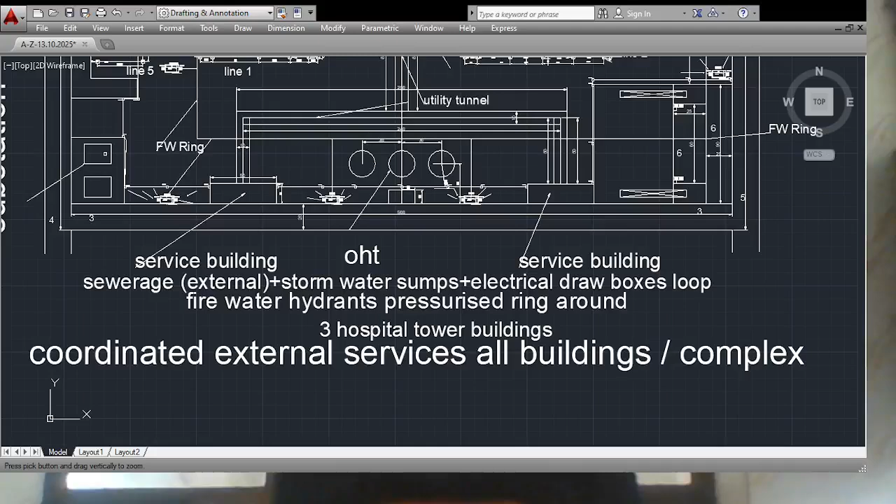This is my supposition based on soul, and I would like to say that this is something good for everybody. I'm just trying to tell you about the soul of this year. Gregorian calendar, this is called.

It is just because today is the day, and I would say you all enjoy this year all over the world. 2026 is a very good number. In fact, 20 has nothing to do with it, but 26 - the meaning of 2 plus 6 equals 8, and this year means result is system, but 6 is important here because 6 has got many positives.

6 is the number of mind, brain, and you can say your brain is linked to whom? Your brain is linked to satellites of the soul. I'm not talking about television or electronic satellites, I'm talking of that.

So enjoy this year in a way that you should not get tension, but tensions will be there, there will be so many issues. This year, 5 has gone already - 5 was control, whatever could be made has been made and destroyed actually. So whatever it is, I'm saying congratulations everyone that you are entering number 6 and 2.

2 is already there for a whole decade, but 6 is a very important number here, the number of mind here. This is mind here, and 6 is the number of mind. People may say it's the number of Venus, I'm not concerned with that.

This was based on site work, it's not just theory. So now I just dug out that record. In 2025, I had with me this paperwork since 1992.

I had worked a lot manually on these paper drawings for a couple of years in those days, which I converted to a township. At that time there were no computers, nothing. I just used pencil or ballpoint pen and scale, and drew on drawings, sheets and graph papers.

I'm just trying to recall. But at that time, due to whatever reason, I could not realize that people wouldn't come forward. I tried with many promoters like DLF, Pushpa Builders and many more, but they were not interested in such a vast project. At that time it was quite big, so I shelved it because I could not arrange any promoter.

Then I again went in '95 to Gulf countries for my job. However, I came back in 2008 to think about something, and then I started doing computerization on these drawings, but I could not complete it. However, it doesn't matter, just the background. I'm telling you, but the fact remains that now I am at some position where I can say we can do this project if some financer comes or some promoter comes.

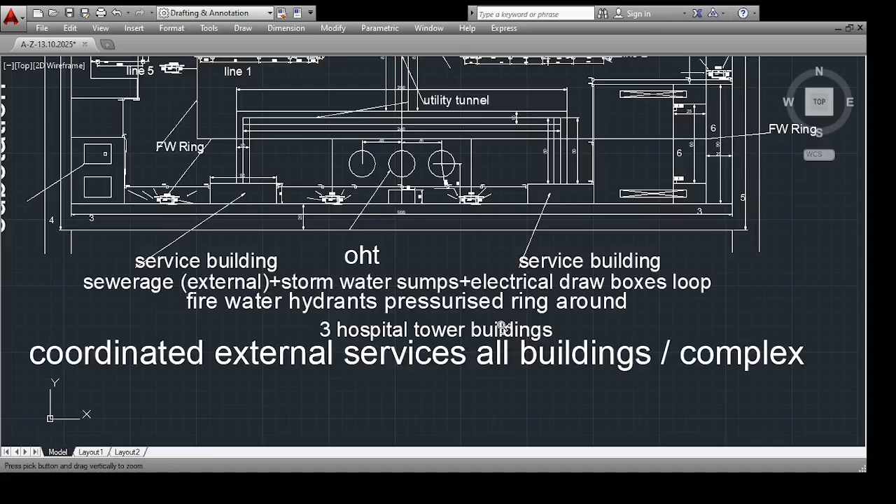This is a complex of hospitals, high profile hospitals. I'm not comparing this hospital to anyone else, I'm not comparing this one. There are certain services which I've shown. You can see this building here.

You know what I have done in this is very much interesting, if you feel so. In this, you may say what all lines we cannot understand. Yes, you may say that you can't understand these lines, but these are factual lines, no jokeism. Now if you see closely here, you see like this. What do you think it is? Can you understand what is this?

Let us say this is your line work here. What these lines indicate, if you have seen this anywhere in this world, if you do not remember, I will tell you. This is here swastika. You know, swastika, this misconception of the all over world. This is swastika here, and this is base of our country. Swastika means something that resembles good health, best health.

This symbol, some people call it Satya and whatever, I don't mind that one. Here these are two sides, here these are two sides, or you may say three sides and two sides, whatever you can say, doesn't matter. Name is swastik, and this was also worn by a top killer, Hitler.

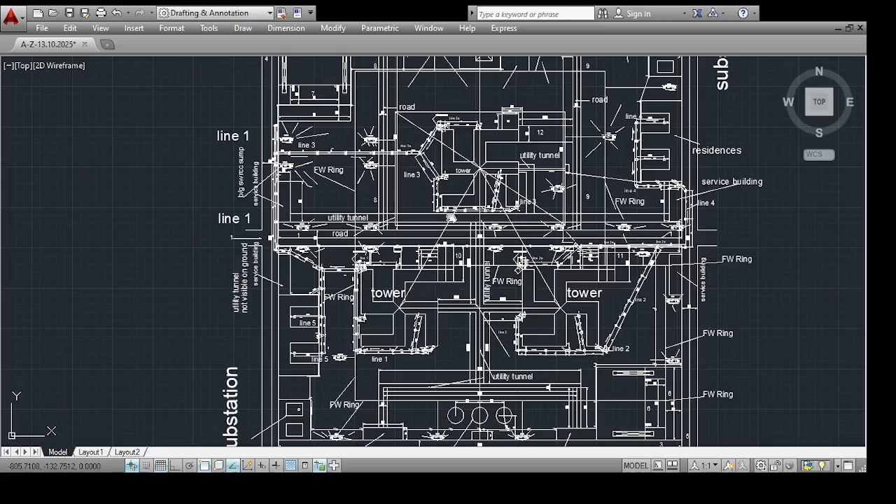Why is that these are placed on a triangle? These three buildings contain hospitals, and you may call this a general hospital. Now, why am I showing this? Not because I want to show you swastik, but because here is a question of services, building services. Every hospital is a complex building. If you consider really, it is hospital, it is based on efficiency or smartness of services which are required for the function of the hospital - it can be medical function, medical services.

Without services, without good and efficient services, hospital can never work successfully, and this happens all over the world. It's not that only in this country, it's everywhere. Hospitals are done that way. If these are not supported well for successful services, there can be no question that you can say, oh, this is going on well, this is a good hospital.

Now, another point is, I'm telling you about three buildings, this is one part of that. The another part is cars or vehicles. There should be space for vehicles. People may say you park in basement - that is not viable. I have placed here, you can see carport, car park, you can say.

This is a carport, multi-level, and there's another carport here in this corner. These are particularly meant for medicos, because generally doctors use a car, and this car is stationed there entirely, day or night, when doctors remain on duty.

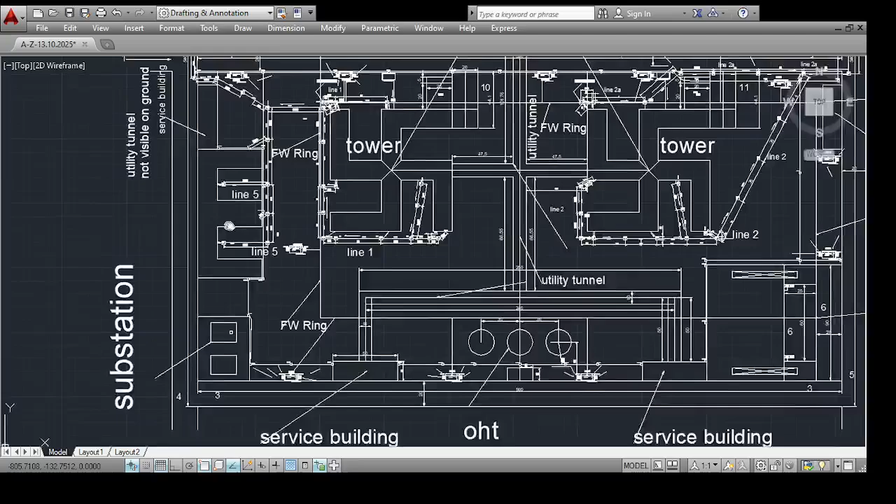Okay, these are two parts. Then what are the supporting buildings? There are more. Here are the main ones, and there is this building, and another building here. These are residence buildings, accommodations on site for the hospital, you may call them service buildings. Here is another service building which is for controlling services.

Now there are so many lines you can see. Why have I put all these lines here? These are required for purpose of coordination of services. Whatever services you provide in any complex or building, if these do not work successfully, there is no meaning of the building. In particular, for medical hospitals, there are so many services which do not exist in normal buildings. For example...

Roads are there, of course every building has roads and compressed roads, that's not an issue. Here is the FW ring, for example, I'm calling this the fire water ring. Fire water is very important in complexes, particularly in emergency-based buildings like hospitals.

Then there's another service, the utility tunnels. You may call it a tunnel or an underground way, whatever it is, where the majority of mechanical, electrical and other service equipment are accommodated, with piping and wiring and cabling running through. That's what's called utility tunnels. This is an RCC tunnel.

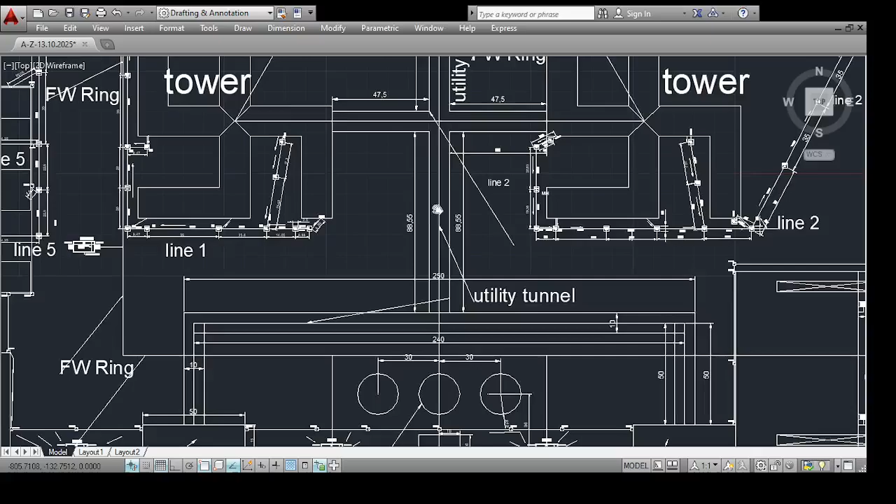Here roads are there, and utility tunnels. For example, I have taken a utility tunnel here, it goes here, then it goes here also, utility tunnel. You can see utility tunnel here, then it goes here also, utility tunnel. So it's all like an underground RCC box structure, and here it goes, you can say here also it goes.

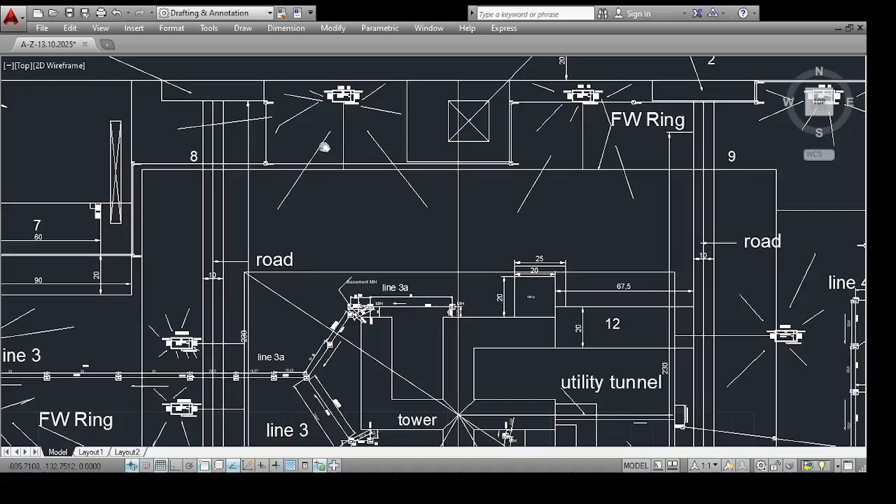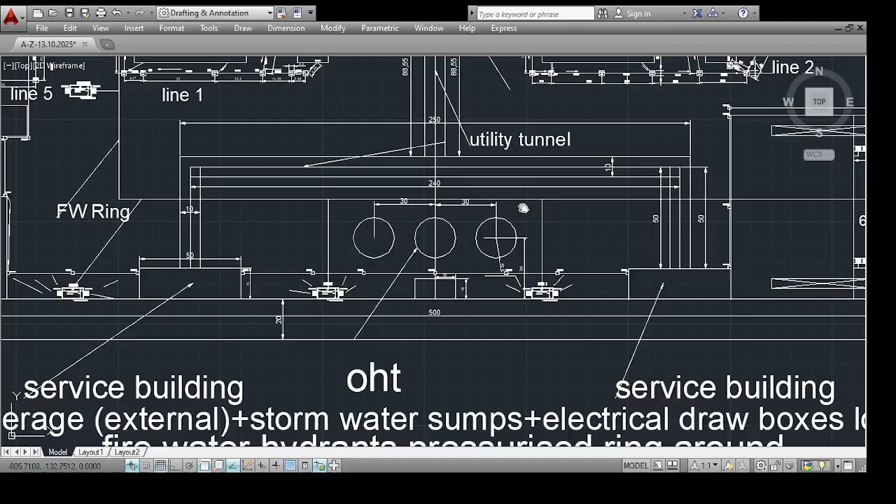Likewise, you can see there are service areas and water tanks. These water tanks, or you may take the other way, may be overhead or underground, it depends upon the request. Sometimes people don't keep overheads, they keep underground tanks with full-time pumping.

And here is another service building which is for the purpose of controlling services. There's a service building here, and also if you see here, we cannot say facilities are the same. No, these are not the same, this is different. Now, in every complex, services means sewerage, water supply, fire water, electrical, and whatever else. These are required. Most important is fire water, then HVAC, then electrical, storm water drainage, sewerage.

These are all necessities which such kind of special buildings, emergency buildings, hospitals require. And there are so many other minute services also which I am not going to show here, it's not possible.

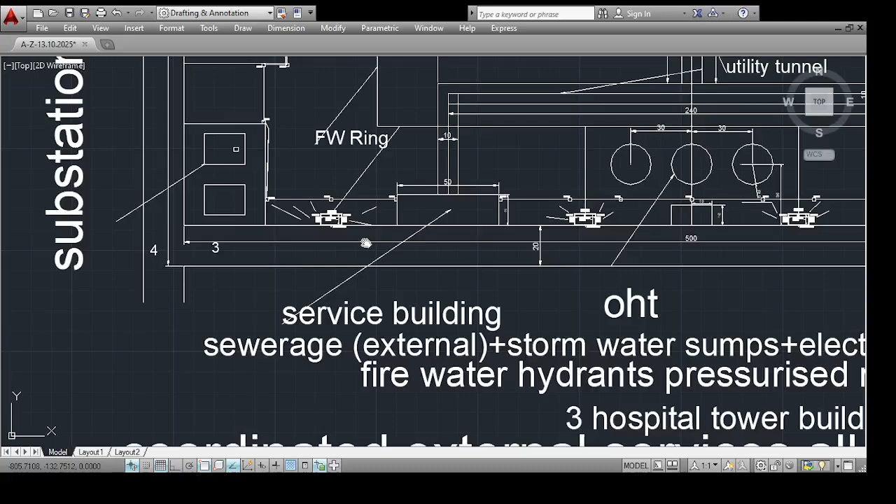And here is, you can say, this is another one which I have shown like this.

it is, just a minute please, let me check my internet because sometimes it goes off here.

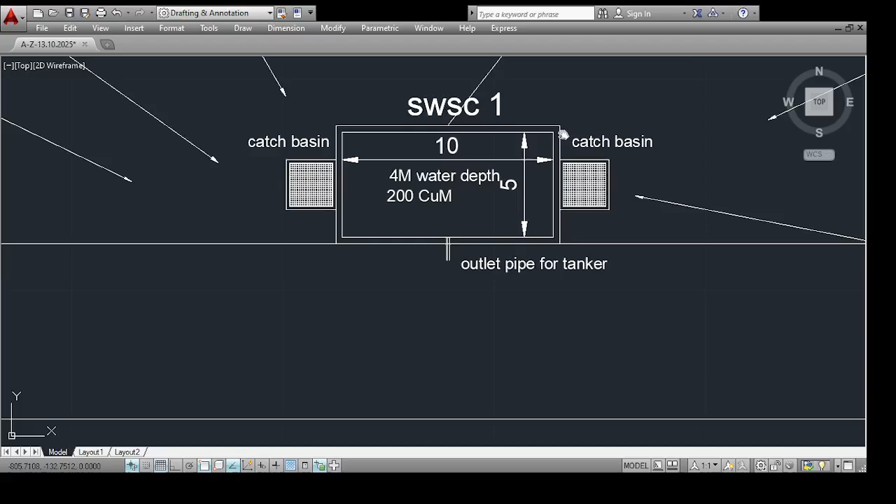And here is, this time 43 minutes. Now this is here, SWSC 1 I have written. What does it mean? Storm water sump chamber. Sump means underground sump. Here is a catch basin.

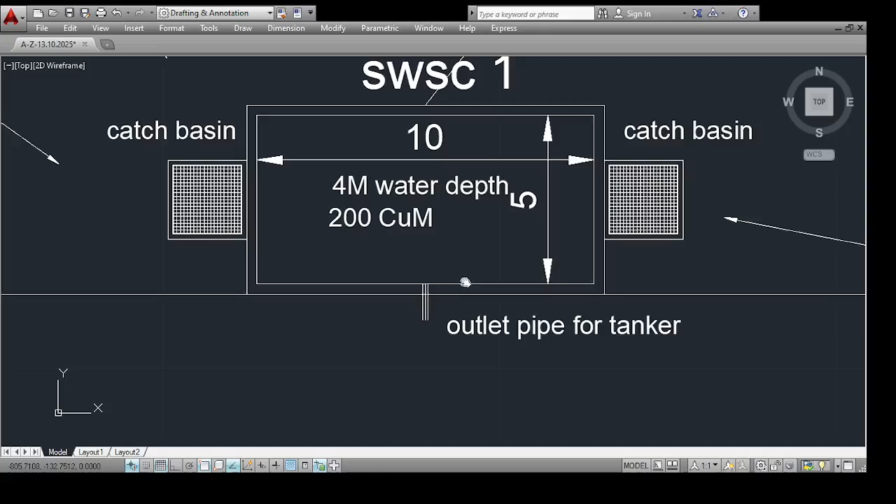Now this is a sump chamber which contains 200 cubic meters of water below ground level. It's not going to be fire water, it's not one tank or one reservoir there, there shall be many such structures.

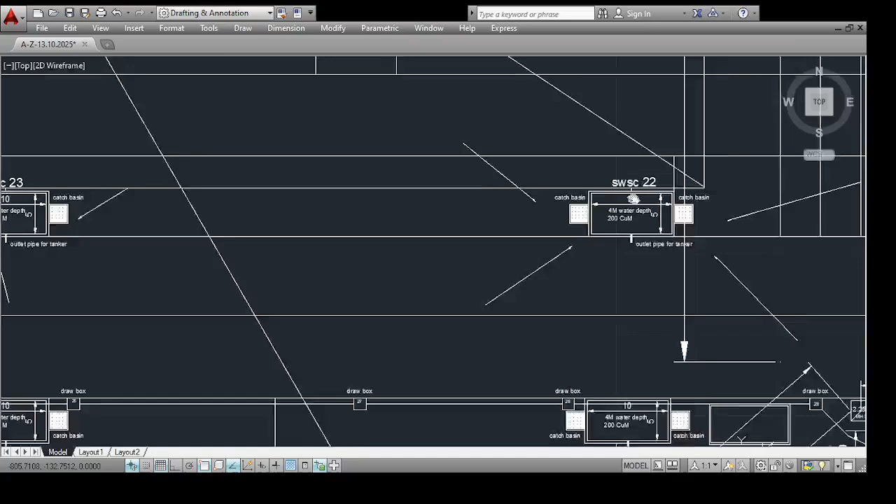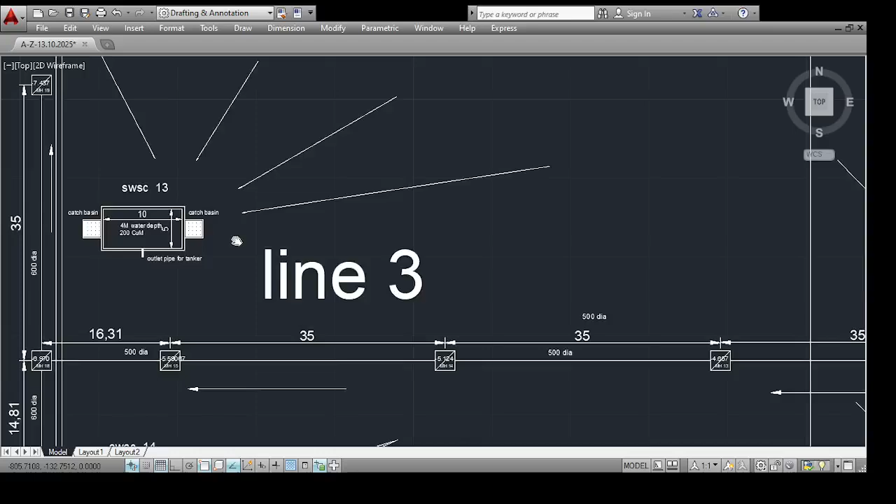So you can say 25 is here, 26, 26, let's say 26, it doesn't matter, numbers mean it. Now what does it mean? Why did I put it? I told you I want to collect rainwater and let it flow to this chamber, or you can say reservoir.

Maybe you are surprised, do you know how much is 200 cubic meter? Many people do not know this. Oh, 200 is very small, they will say, they will understand it as 200 liters. No, it's cubic meter. Cubic meter means if you say 200 cubic meter, multiply 200 by 1000, so you get 1000 means 3 zeros, 2 lakh.

It's like a water tank. And 200 cubic meter, I say 26 are there, let's say. So how many cubic meters there? You think so? 5,200 cubic meter water can be accommodated during rain in this.

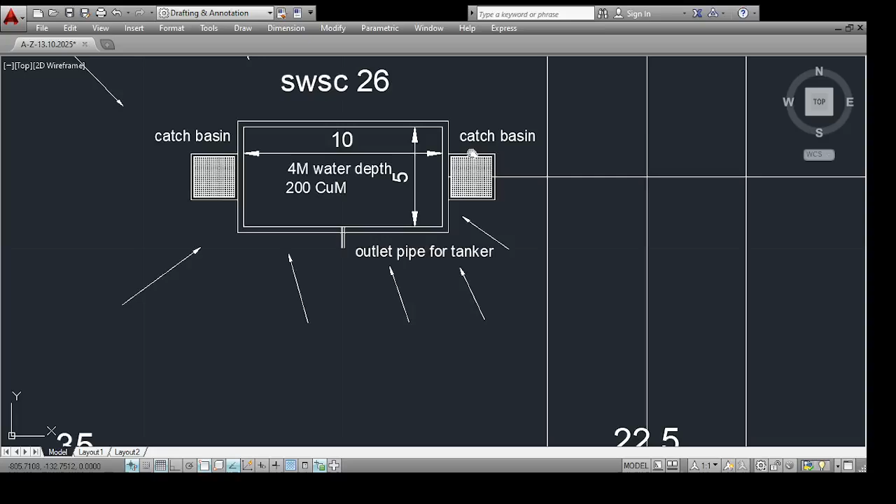And how it is? This is what we people have deficiency in our projects. Why is every complex flooded during rain? That's a question mark, because lack of thoughts, lack of understanding of construction engineering designs. But this is very small, very easy.

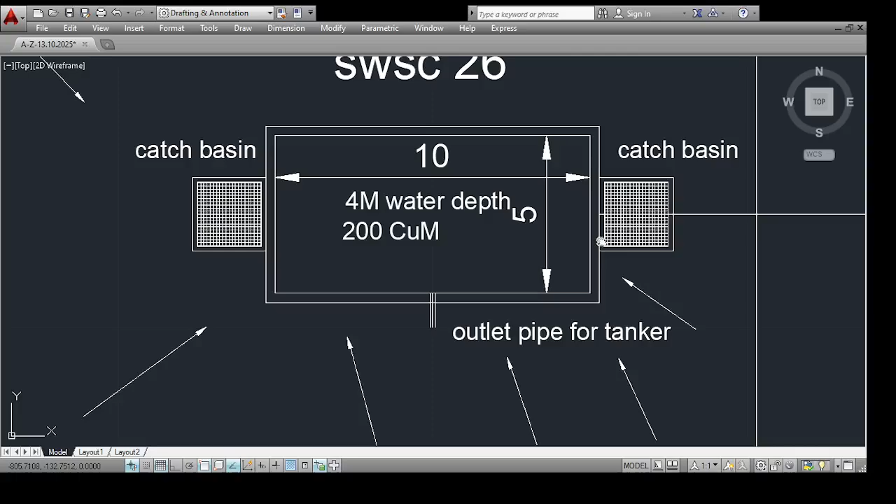I try to put catch basins on both ends, and I have given grades, ground grade, in a way that water should flow towards these chambers. Catch basin is there, and there is a section of that.

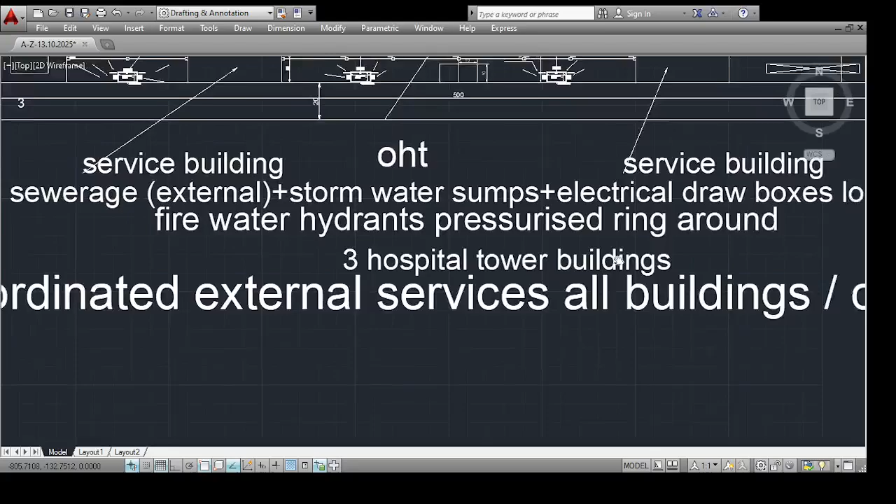I don't know, it's here somewhere. If I don't exactly remember, I placed some in the other drawing, not in this drawing, no problem, I can't open the other drawing now. And it's written service buildings, etc., and sewerage plus stormwater sumps and electrical draw boxes, loop, fire water hydrants, pressurized ring around, and these are.

There can be a lot of discussion on this, because rainwater has to reach from various catchment areas locally to these well located chambers, and from well located chambers this water has to go further at your timing. If you wish that it should go into ground, pipes can be connected below these chambers for permanent disposal to reservoir below ground or within ground, beneath in various layers.

Or if you say no, we want just to store this water, and at a later stage when there is shortage of water, we can use this water for whatever other purpose. It may be irrigation of green area, and it can be used for ordinary use, potable water like that. It can be taken to tanks for further use, maybe after filtration or after chlorination. Or it can be delivered to whosoever wants to get this water through tank. This water can be transported to wherever is required.

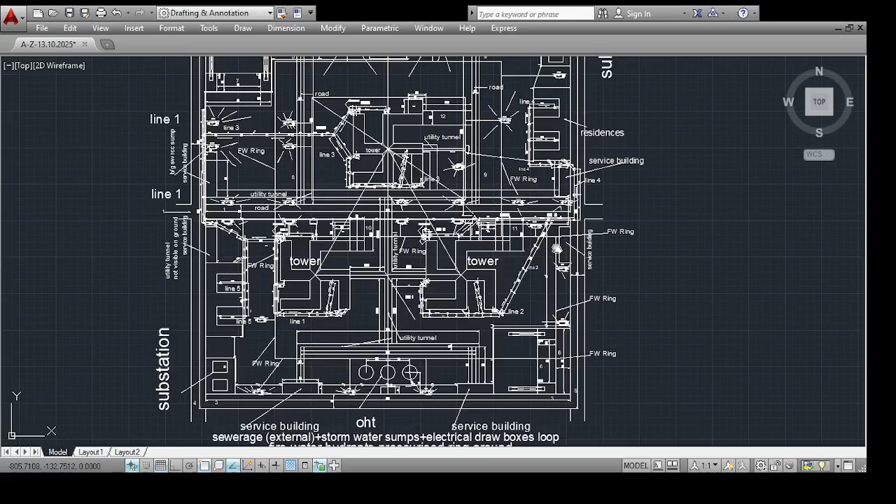That is the sole criteria behind that. This shall be an RCC structure, water leak proof, and this shall keep water in this. Yes, there can be chances of silting. You may say silting would be there. Yes, it can be there.

But we have various provisions these days on this catch basin, as I said, this catch basin here. On this catch basin, there is a section of the house shown, below which there is a mesh, a kind of cover, manual cover type, catch basin cover type, in which we can provide a kind of mesh so that we don't allow non-water impurities, or you can say dust, to go into this chamber. It shall be filtered out and removed.

That's the depth of this catch basin, also around 1. So up from that level it can go down into this tank, and there is piping also in this tank which can be used for the purpose of pumping water to whatever tanker if it comes. So you can say it's a kind of source chamber which can help you with rainwater preservation, and also many other purposes if you wish. This is that one only.

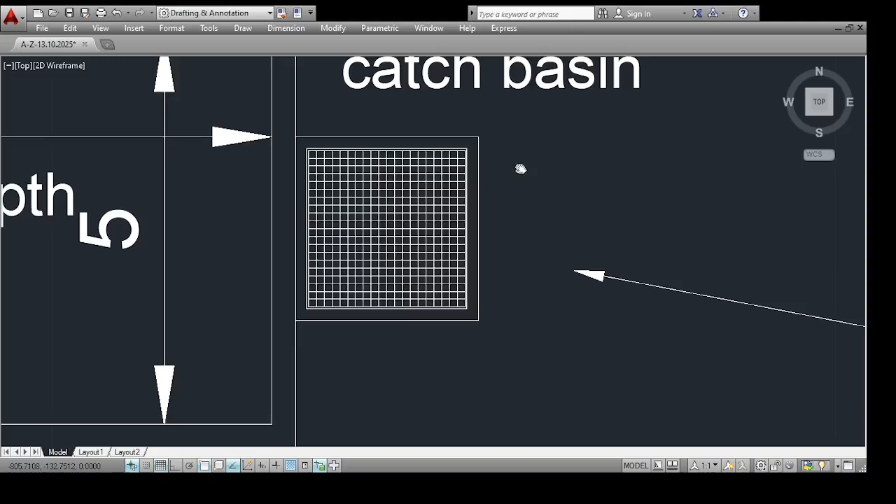And here is now fire water ring. As I said, what is fire water ring? People may ask you, it's not fire water, it's fire extinguishing water. Firefighting water is firefighting water. It is a very, very important part, and firefighting water is very important.

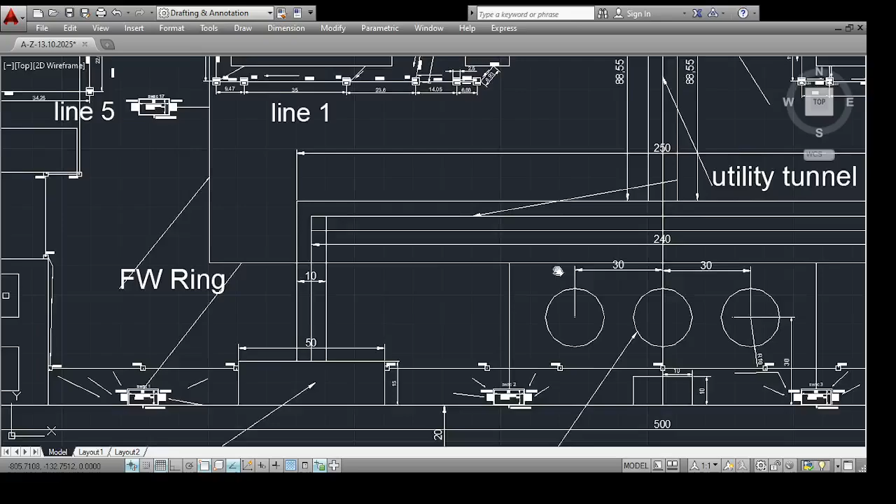15 minutes, okay, have a look on this, it's interesting if you think. Now, this fire water here, you can see this line. It goes like this, here it goes here, and then it goes further. This is fire water, then it goes this way, fire water ring, and of course it goes this way then, and then it comes here, fire water ring is around this structure.

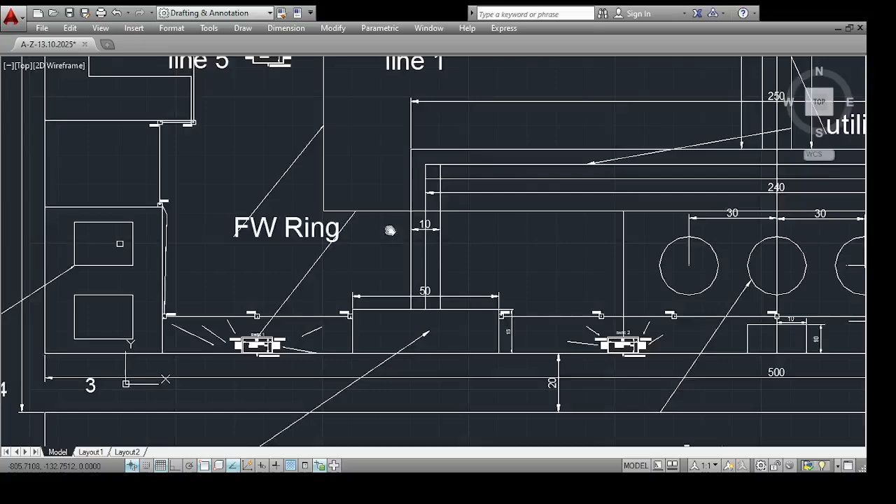I have taken it in the periphery here as well as in the middle. I think I can show you that one. In the middle it is one line, and that is here. You see here, it's going, the fire water line.

Likewise, all these three buildings, towers, you can say this fire water line encloses all these three buildings, because what is important here is where chances of people are there, chances of expensive items are there, and that is the hospital buildings. This fire water shall remain pressurized all the time, and there is such capacity the water can reach into the top building from below, because it's very difficult to control from above. So that shall be pressurized all the time, and hydrants will be there indicating the fire water line. This is one part.

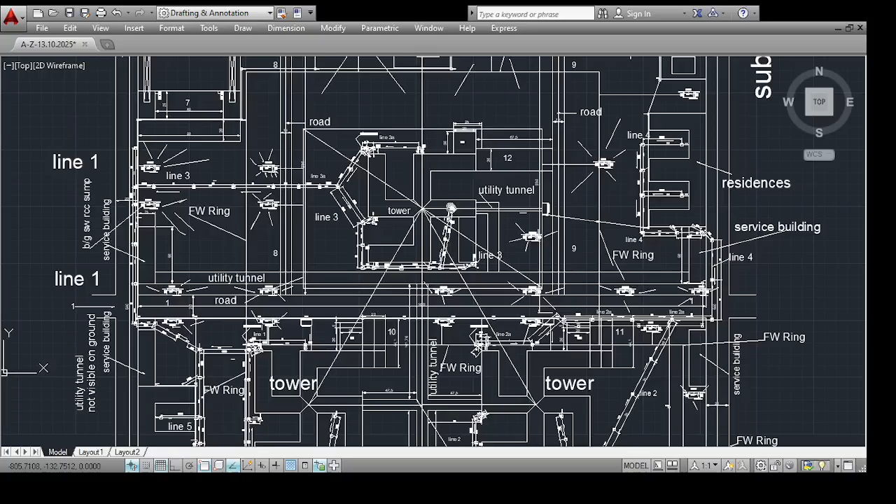Then there's other roads, you must have seen roads are there, there's no problem here. And then now the most important part is, which every building should have, and that is an important one.

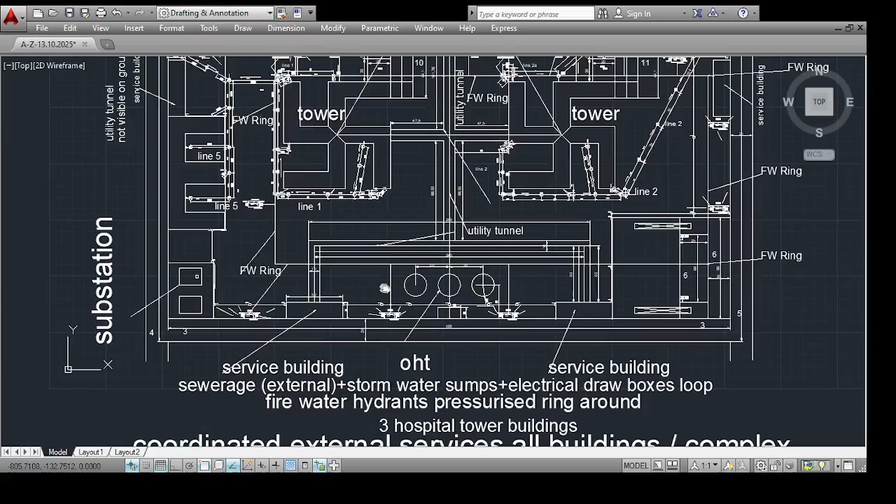Now what I have done, where there is a disposal point, or you can say where there is a wet area, I have linked all that. For example, I have put a manhole here. This manhole comes here at this point. Details would show everything how it comes here. This goes around, and you know, this is line 1 given.

Labels are given for every manhole depending on distance and gradient, and it goes like this. You can say, first of all, this is a very specific manhole here. This is BM written here, MHBM, manhole basement.

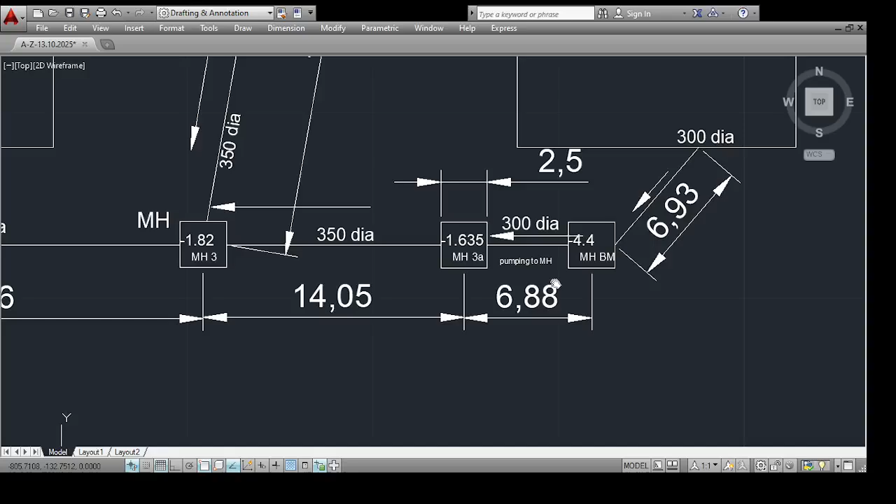There is a basement here also in this case, so we have to pull that out, pump that out to an external location, and from there we have to take discharge from the basement, which should come to this manhole. That's why I've written minus 4.4 here, the level, and then it should go to another level here by pumping. There's no other way, and then it should go naturally to the other line, you can say, and this is the sewerage line you can say, and there are such lines all over there.

Line 1, line 2, likewise I've written in this case all over, you can say. This is kept in view, and this is line 1, line 2, line 4, for example here. Likewise many lines are there, sewer lines, which should be taken out to the periphery of the buildings, from where this goes to the main service line, the main drainage line of the city or area.

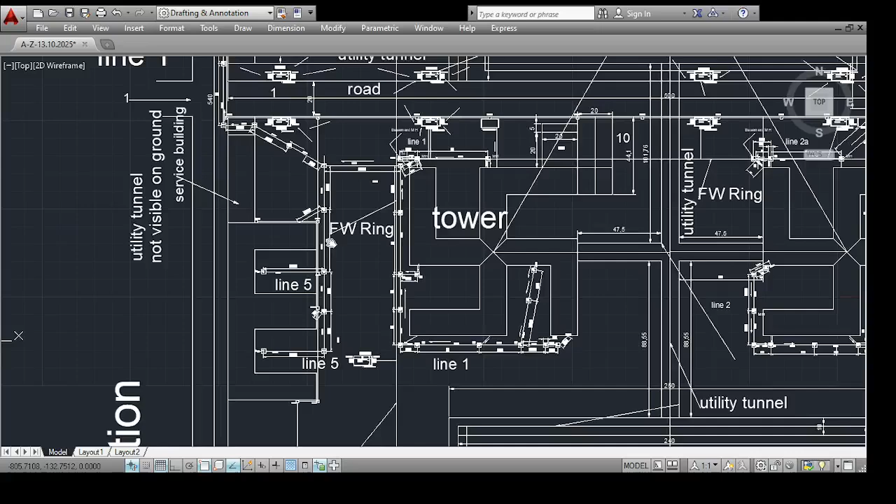But internally we have to check them everywhere, because externally there's no problem, that is a straight line. Internally there should be so many turnings, so many issues. We have to avoid clashes between other services. Clashes are always there in whatever building structure we do, in whatever way, residential, commercial or otherwise, there's a complexity. Services clashes on external services occur, and this point we have to keep in mind while doing this.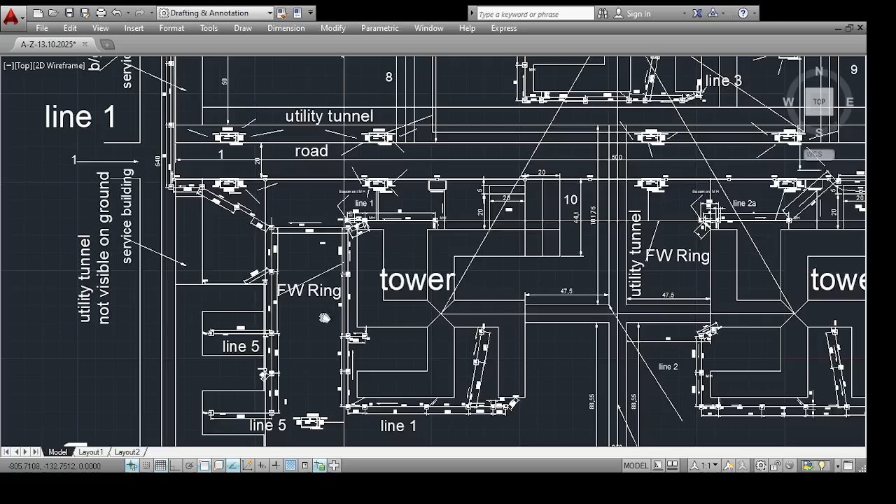It's not a question of architect or engineer, it's a question of services, and it's very difficult to coordinate because everybody has got a different idea, everybody is different, but coordination does not know anything. It says you have to give me information and we will do it, and that's why.

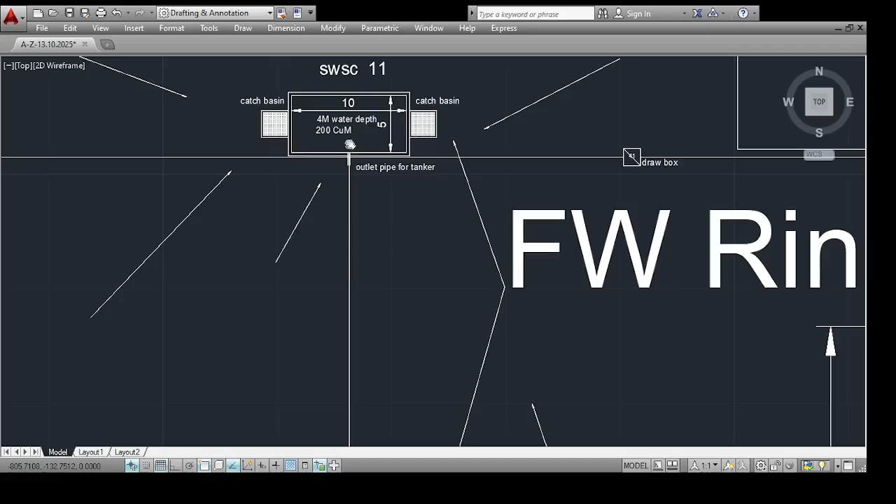And you may say also, it's not simply that, then we should think about electricity also. How? Because we have forgotten them? No, we have not forgotten them. This is already there, electricity, and it's a very small point actually, that's why I'm not able to show it clearly.

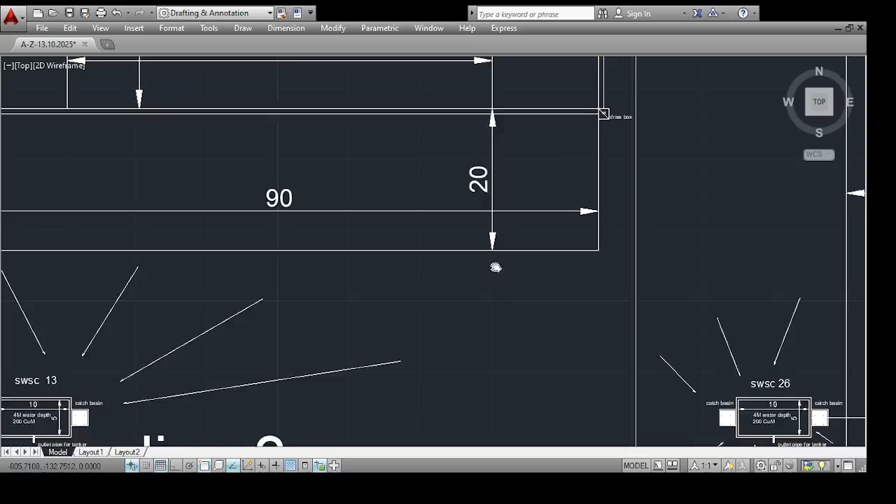There's so many electrical drawboxes here. For example, here is a drawbox, you can say. This is 46 number drawbox.

Electric supply is required at all locations in whatever building we do, and if you don't do that, it means nothing can work. If structure is required for a building, services are run by electrical power, mechanical services, other services, facilities, the electrical system must be there.

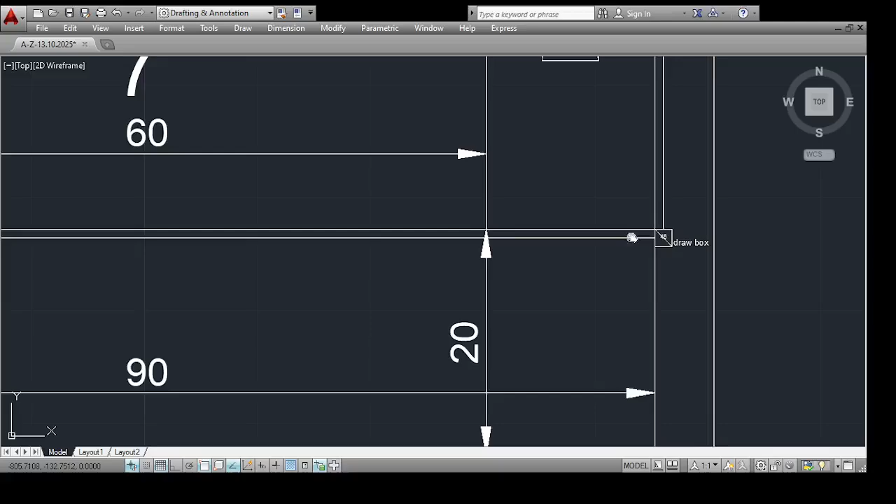So here is what is there, can say. This is drawbox 747, then it is another manhole, and then a drawbox is also here. Because we have to see clashes should be avoided, that's an important part. So accordingly clashes should be avoided. So here is a drawbox, you can say manhole.

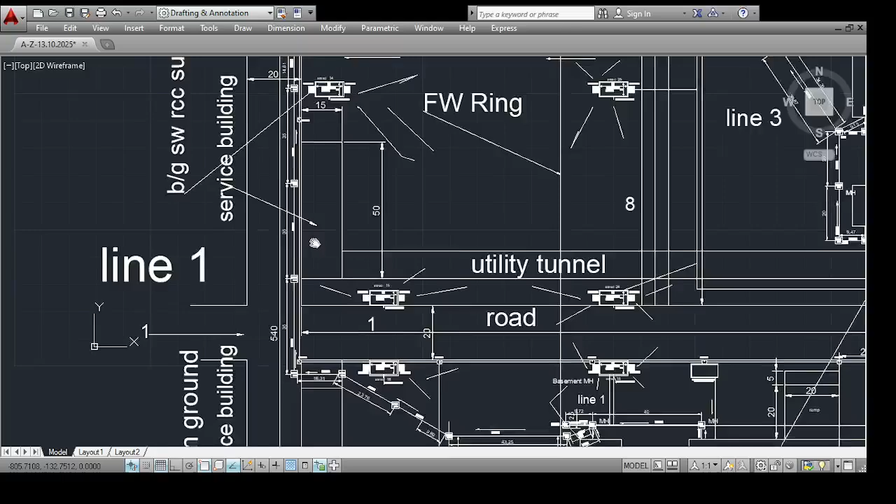This means every drawing should have a separate presentation, but it's only for the purpose of coordination. This is called a drawbox, here. You can see this is drawbox, right? Likewise drawbox is here, and drawbox is here.

You may say you are just putting here where this chamber is, but this is going to pass on the chamber. This chamber shall not be visible, it shall be below ground, say by 1 meter. Its structure would be, only these catch basins and manhole covers would be visible, because manhole covers are required. It's not the manhole, but covers are required for covering, for access and for keeping also. And earth shall be filled over up to ground level.

So this is the drawbox. There's no problem because the drawbox is never too deep, it's hardly 1 meter down, and this is more than 1 meter the roof of this chamber, and it will go like this.

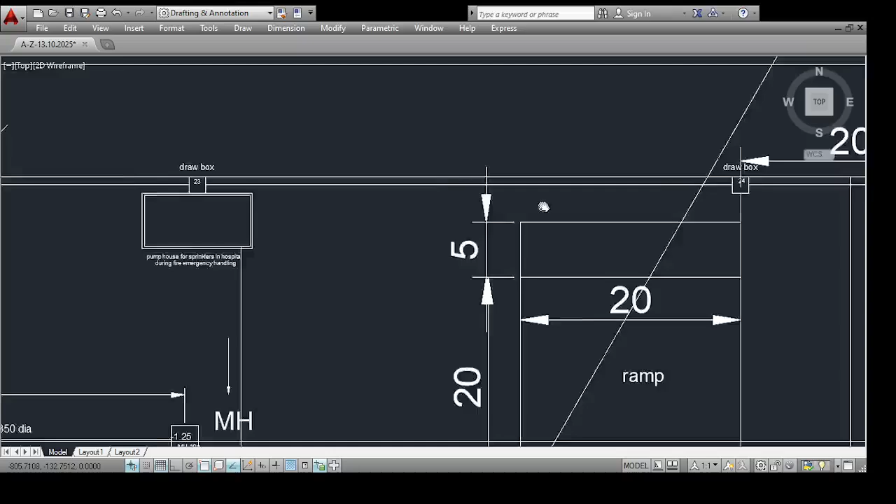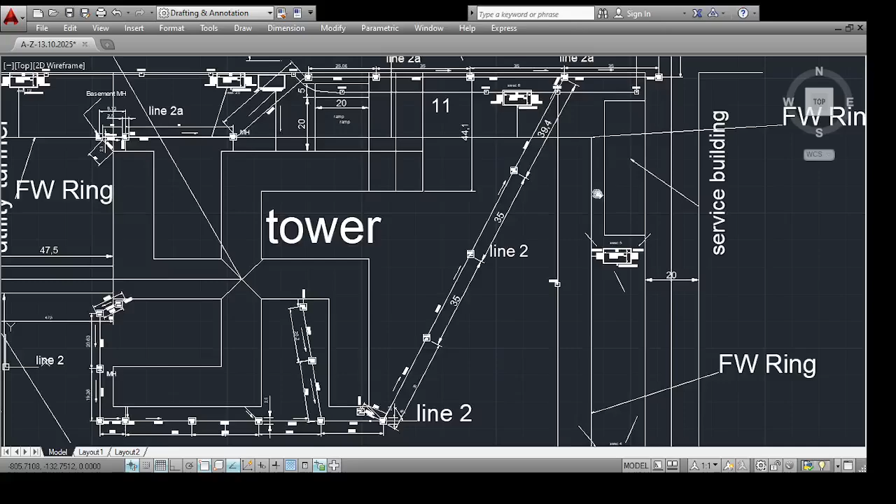These draw boxes run all over, covering all areas. You see that. Here is this is your draw box, this is your draw box, and here is your draw box, here is your draw box. Likewise, there is the draw box.

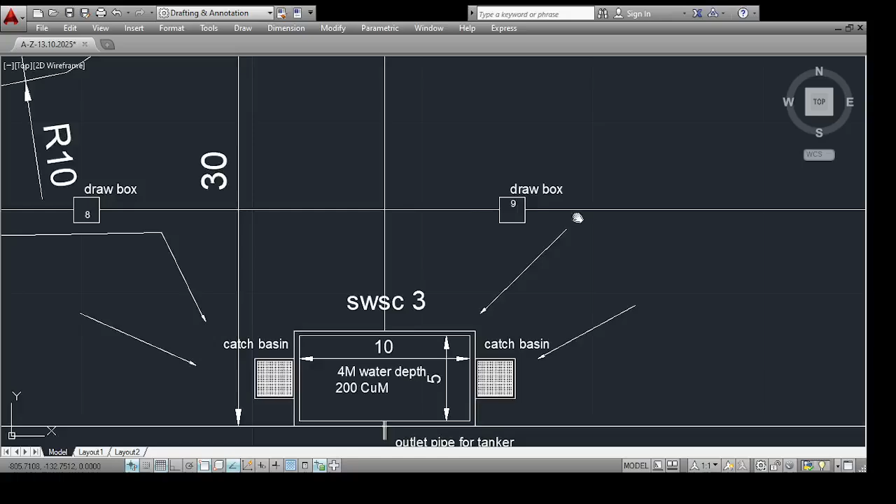Pulling wire box, we call it draw box. Actually it means we draw wire. We have draw wires using these boxes. The kind of such manholes these are, not sewer manhole, this is electrical manholes, we can call them.

You can see draw box keep running. You can see here also. As I said, how many numbers, and these are here. Likewise here, and this goes there and there.

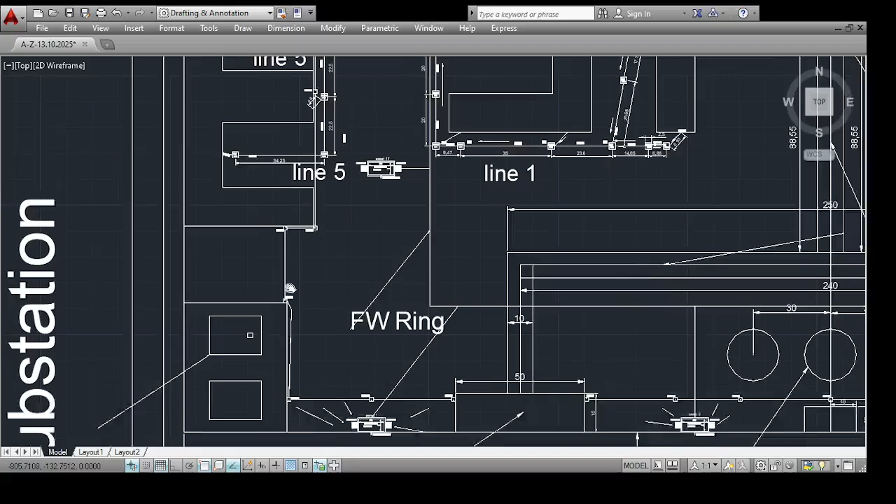And their lines, fire said, these are all sewerage lines. I'm just trying to show you what is there. There are so many more there, but here it's very difficult to read them by everyone, because I have done it, so I'm telling you. But there will be so many such services inserted at every floor, internally as well. This external one, I'm not talking about internal.

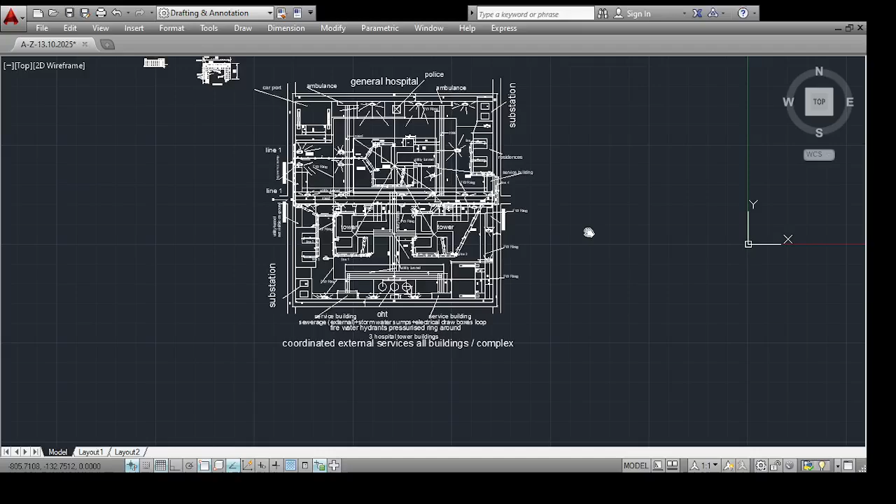There will be internal services over there too, in addition to medical gases. Medical gases services shall be there. Oxygen, this and that, means so many medical gases are required. This all shall be there.

So you can now understand what is engineering on buildings. Input is required from all disciplines: civil, mechanical, electrical, architecture, and these services. So many disciplines are in demand on this, and only those people who can understand, they can do that.

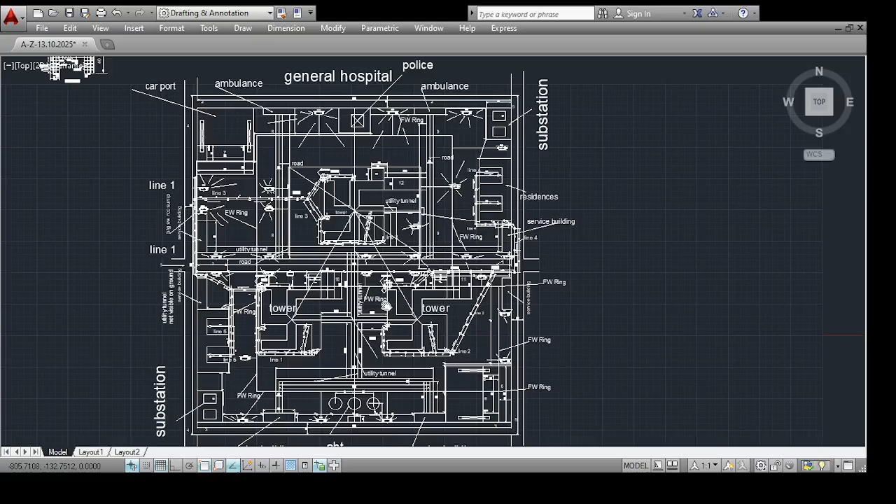We have many others, as I discussed, I showed to you yesterday. I could not bring another drawing because of restrictions. I cannot open all drawings in the same video.

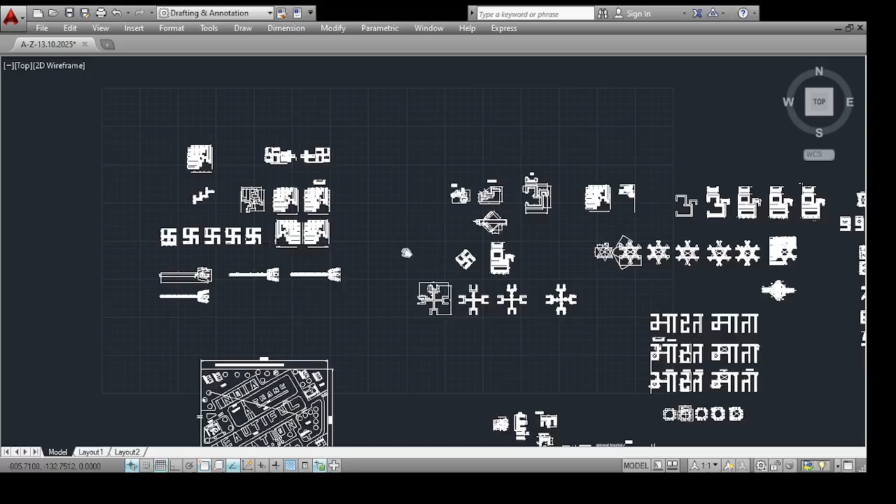But here is the same thing, in this building. Every building shall have the same except medical services. All buildings shall have the same kind of input. Same kind of input, you can't say no or yes.

No, this is another part of this which I am very interested in telling: how can we understand what we are going to do? Now, for example, this is building A.

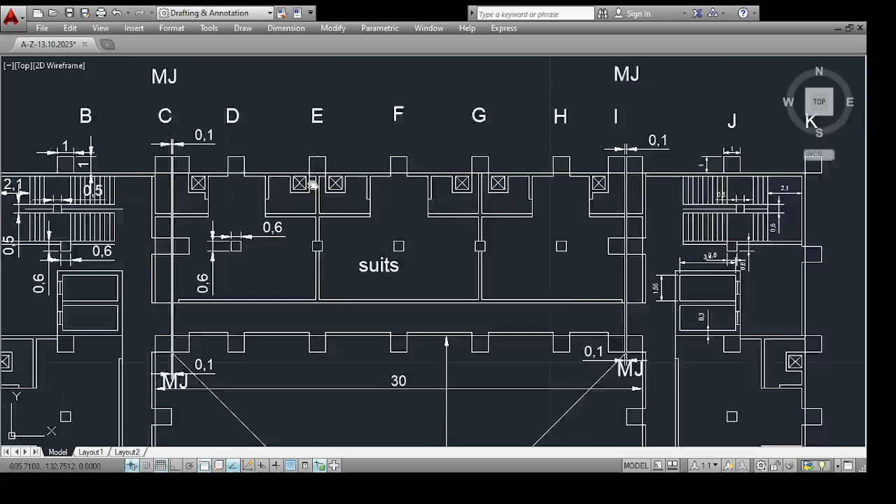On all these drawings, you shall find these accommodations here. For example, suit I have written here, doesn't matter. These are columns here, RCC columns, and here some crosses are here.

These are actually service ducts. People call them shaft or something else, but technically speaking, these ducts mean these voids. There is no concrete here. This is a plan I am showing to you. There is no concrete here.

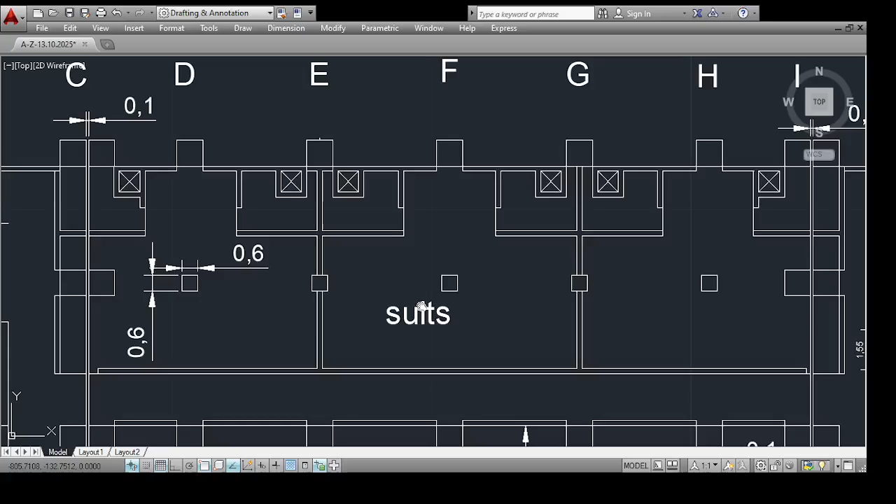But it has to go from bottom to top, like that. So through this, sewer line comes here, if we say there are some pipes, they will come out. And that's what I say, it's written here. How shall this come out?

Every building has a different direction, a different one. That's why these ducts are also at different locations. And this is really complicated. Sometimes it's in this direction, sometimes in another direction. We have to be a little serious about this. It's not that one, seriousness is required everywhere.

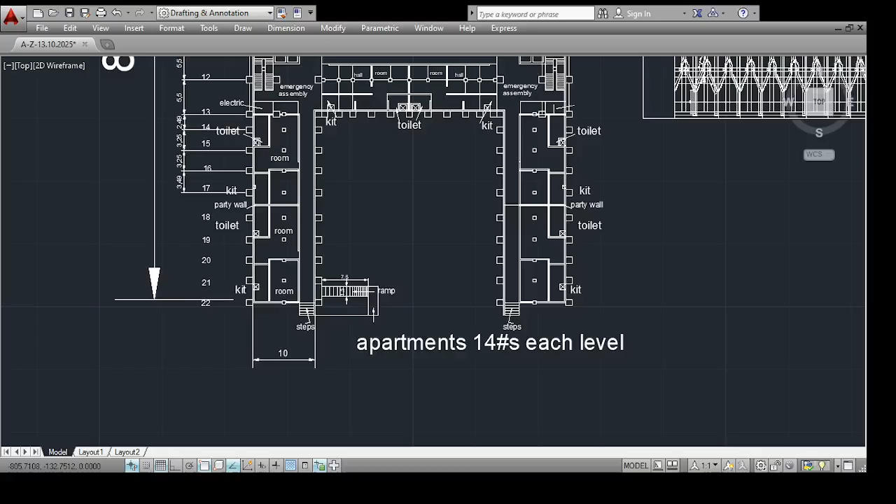And if we are not serious, we waste time, and which is not good for everyone.